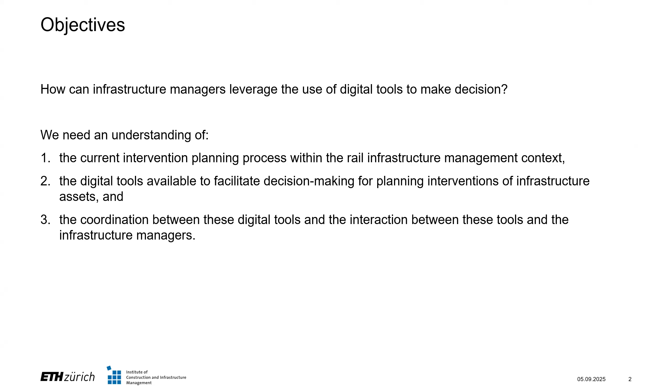For example, you can think of, let's say, a corridor between two cities. Maybe they expect the population to increase in one part and they will need to commute between the two areas. And they might want to increase the capacity by building a parallel track next to the existing corridor. So that would be an example of what would be a network development.

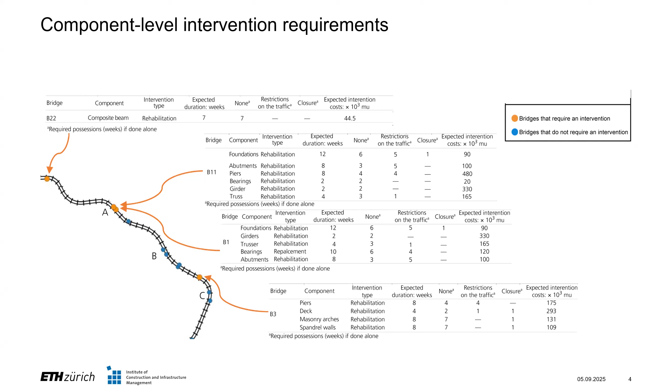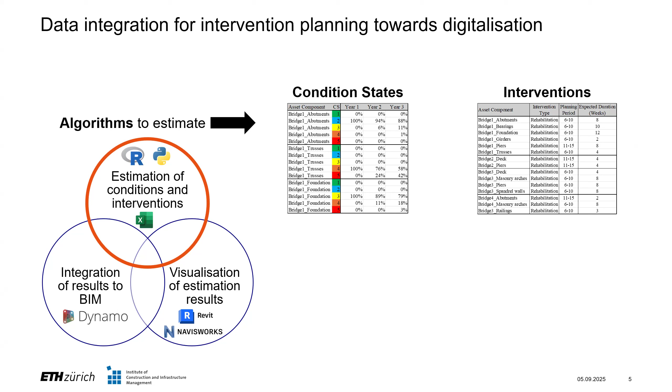So with that said, we have the algorithms that can estimate the condition states as well as the intervention on a component level. And the goal here is to be able to create a 3D model based on whatever information we can find, whether it's from 2D plans or from satellite imagery, and connect that information on the condition states and the interventions and embed it within the BIM models so that the stakeholders can easily play with the model itself to visualize that information as well.

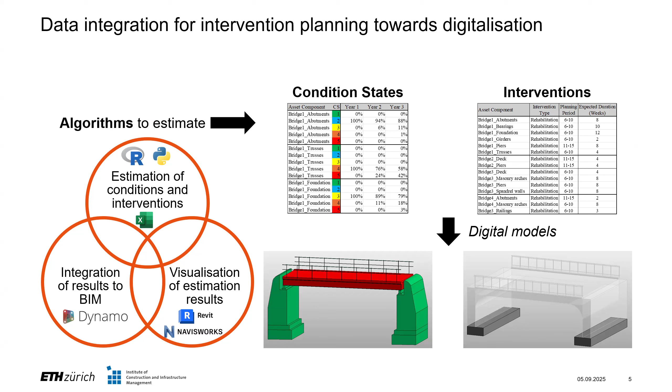So here is how we have defined the scope of the work in the context of this railway network. It's located in Switzerland, composed of 30 different bridges of 4 different types, with steel, composite, masonry, and concrete.

Here we have largely relied on 2D drawings to create the 3D models using Autodesk Revit.

Here we were pretty clear about the level of development that we expected the models to have. The level of development can range from 100 to 500. 100 is a very basic model that shows the general shape of how it will look like, versus level 500, which has very detailed connections, typically used and required for construction activities.

The models we have done here are roughly between 250 and 300, and to us that is sufficient in the context of intervention planning at this stage, because we are only interested in seeing how the component level condition state and interventions would evolve over time. We don't really need to see how the connections will look like between the different components. So that's the level of development we have done in this railway network.

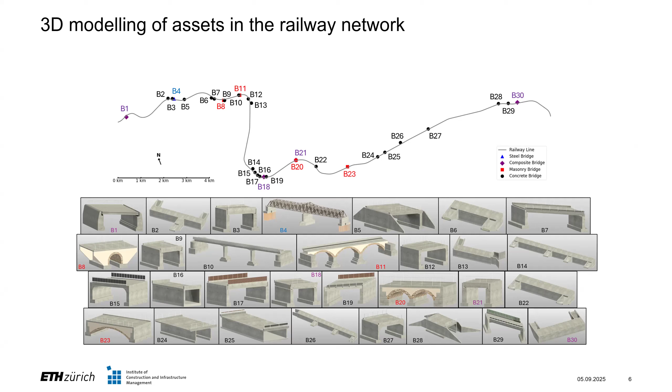Then the next step becomes how we can show this information to cater to the needs of the different stakeholders that are involved in the intervention planning process.

Just to do a quick recap, we have these 3 main stakeholders who we are very much interested in to help make better and faster decisions. First, the asset managers who specify the intervention requirements, typically done 4 to 12 years before the planned execution of those interventions. Here the granularity of their decision making is typically done in different planning periods in Switzerland, these are typically five years for the railway planners, but it can be longer depending on what kind of assets they are working with.

Also, the network managers, who, like I said before, are interested in clustering the interventions in a way that minimizes the impact to the stakeholders. Here they also define the specific work zones that each project would be part of, so the perimeter of a corridor or within a certain region, on what interventions can be grouped into that.

And finally, the production planners and the project managers who would define, in increasing level of granularity, the closure required to perform the interventions, as well as the sequencing of those interventions from months to weeks to days.

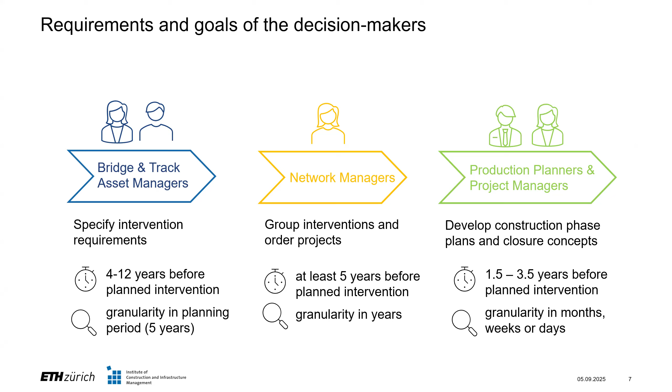So this is first an example of how the information will look like in terms of visualizing the component level condition state on the assets.

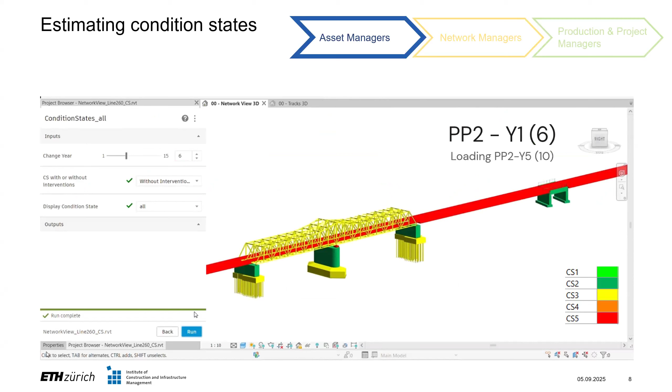This is a demonstration using Autodesk Revit, and the plugin we use as well is called Dynamo, which is able to link the information output from the algorithm and then embed them within the properties and attributes of the model elements within the BIM model itself.

Here they can play with the different year, the different specific filters, to really get a good sense of how the condition state will change over time.

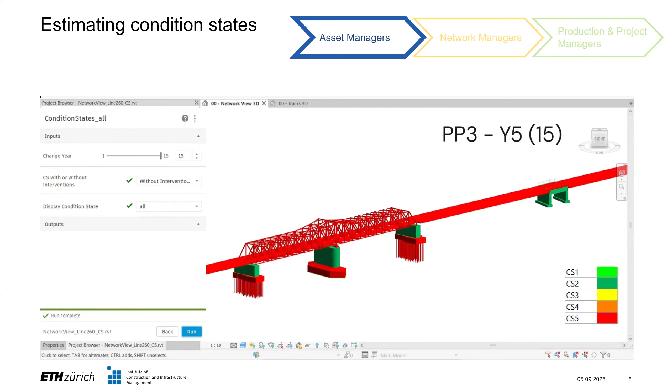They can also see the information on the intervention requirements on the component level. They can see the same table that we saw at the very beginning of the presentation from the output of the predictive algorithms, information like the cost or the expected disruption or the closure required to perform the work. Also the type of intervention that is expected to be performed on those components.

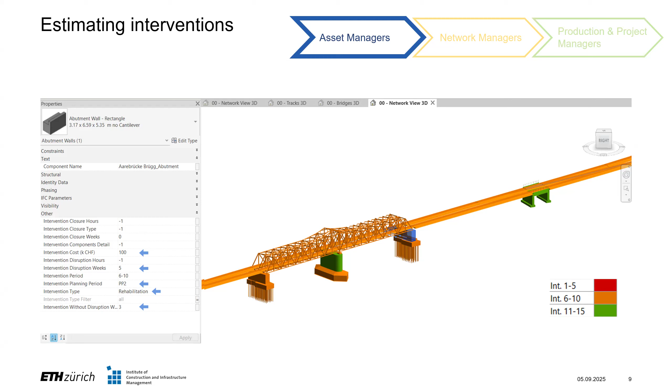Once this information is defined, let's say the asset manager has already output a list of the required interventions after having gone through the engineering analysis, then the network manager can cluster this information and then optimize the grouping of those intervention requirements that they receive from the asset managers.

So this is the demonstration of how we can visualize the output from the optimization algorithm that have already clustered the intervention requirements, and they can filter based on the planning period into the future, whether it's year 6 to 10 or 11 to 15. They can filter based on the time window, whether it's a weekend or the week, or in the evenings. They can also look at what components have been clustered to which specific year of planned intervention into the future.

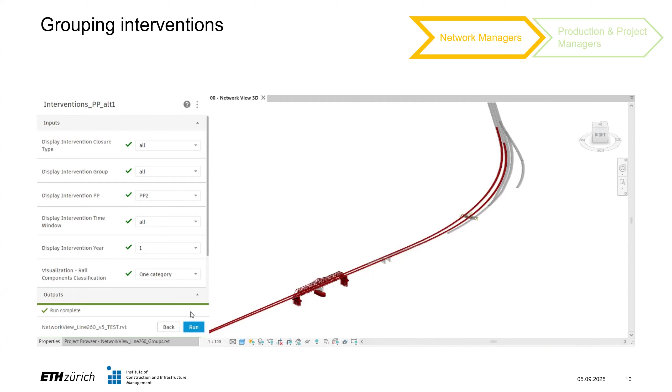In this specific demonstration, the network manager can very quickly see the relevant components according to the filtered criteria we have set out in this example. And this is not only beneficial for organizing the spatial understanding of the components required within this specific planning period or planning year, but it's also a very effective way to disseminate this decision to the other stakeholders involved in the intervention planning process.

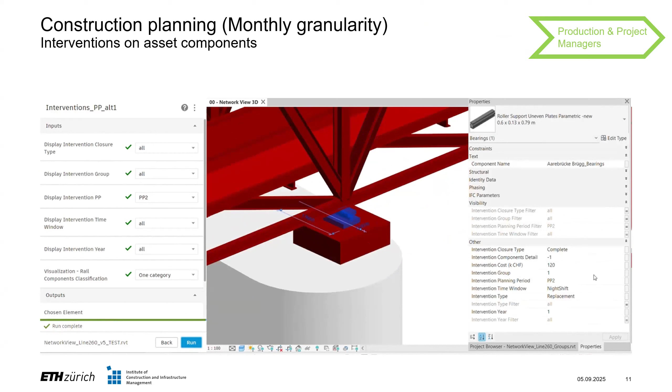Using the same type of information, the production and project managers are also able to click on any specific components of the model to look at the estimated information in terms of the time window or the type of interventions required on different components. And this is always aligned between the different parts of the planning process, between network management, project management of clustering the project, and also the actual planning of execution.

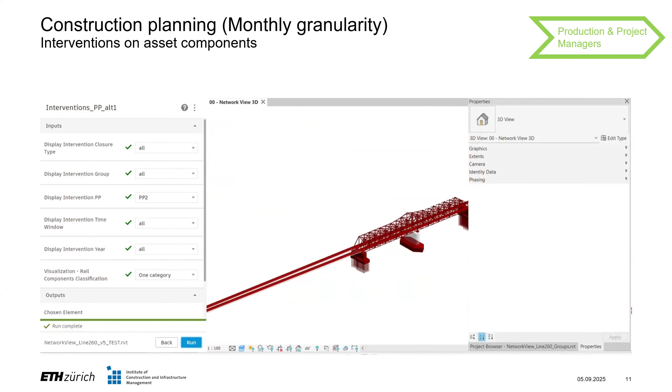So the goal here is to really have a very streamlined flow of data and information from one part to the next. And in terms of how they can look at the spatial temporal aspect of this same information, this is a very typical view of how they plan the construction of interventions. On the x-axis, you can see the spatial ordering of the different stations, bridges, and assets contained within this railway network, and vertically you can see the time scale we're looking at.

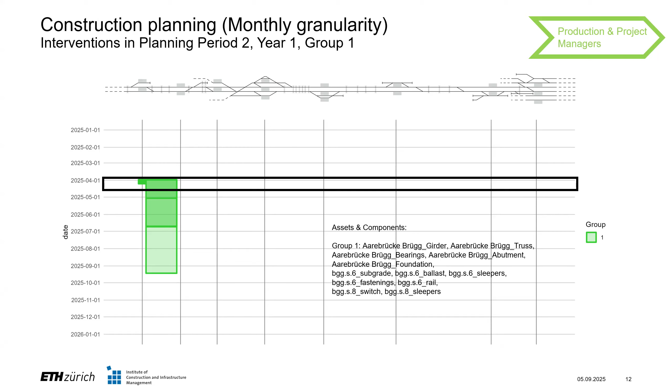So this is the direct output from the algorithm, where we can see what kind of components have been grouped within this specific clustering of the project. This is done on a monthly scale, but we can also incorporate the train schedule information and look at it in increasing granularity, in this case daily, to really see the impact of the planned interventions on the network and what it means to stakeholders, whether passenger trains or cargo trains that need to use this network in the evenings, for example.

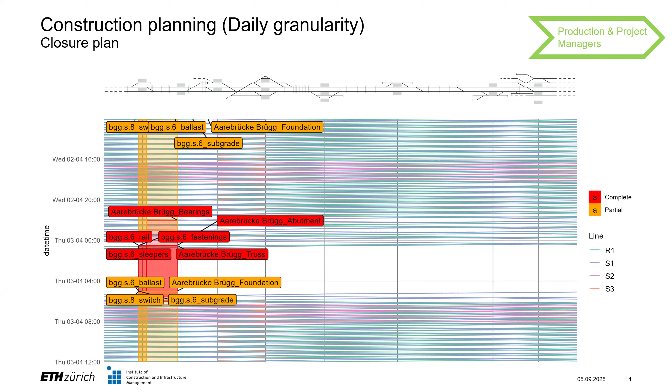And we can zoom in more to really see exactly how these planned interventions on the components should be done. This information can be exported into a table to then incorporate it back into a BIM environment, in this case using Navisworks, where we can really see the sequencing of the interventions.

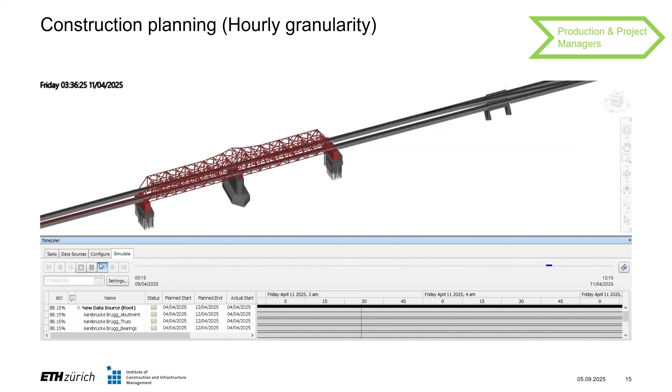So this is not necessarily the plan defined exact way of how the project should be run. This is done quite early on in the intervention planning process, say three years beforehand, before the planned execution of those interventions. But at least this gives a pretty good sense for the production planners and project managers to see exactly how the sequencing will look like as suggestions.

But of course, once they get more detailed information and coordinate more closely with the capacity planning team, they can define the exact sequencing of those interventions.

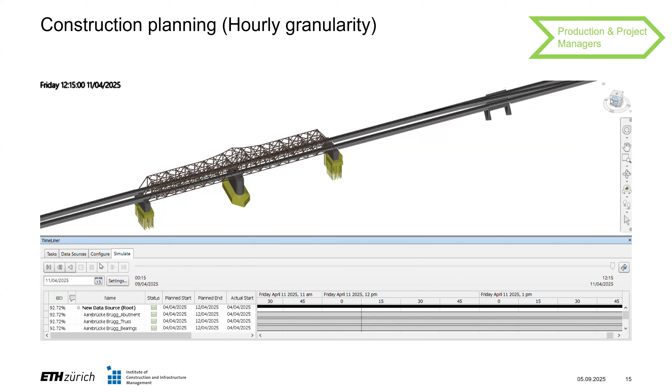So in terms of how all this work will fit within the planning process, these are the areas where we think the asset management perspective, the network management perspective, and the project planning perspective would benefit, where we see the use of BIM and incorporating the output from the predictive algorithms can really benefit decision making.

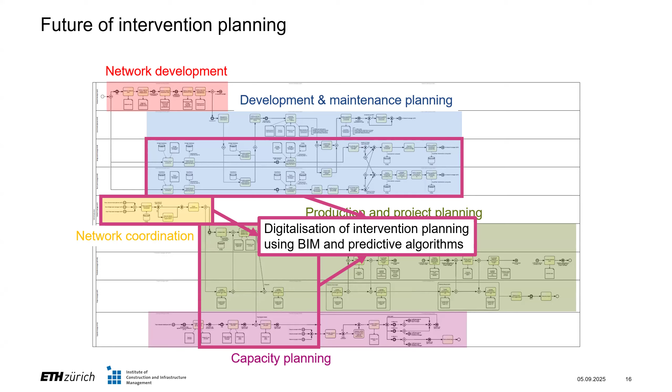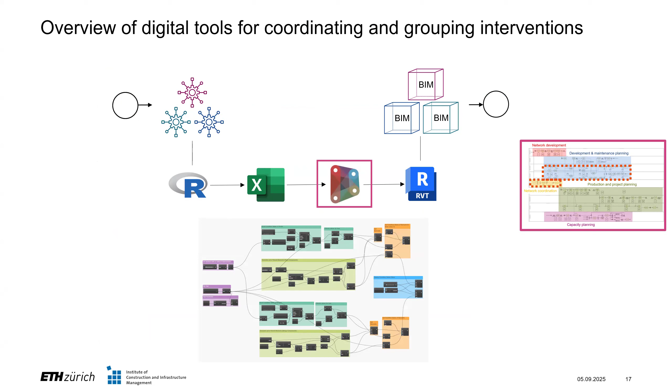And just to quickly go over some of the tools we used, we have the output algorithm which we currently work with in Excel, for example, and that information is fed into the BIM model using Dynamo, a plugin in Autodesk Revit, to link the information from the output of the algorithms and embed it specifically within the properties of each element within the model, which would eventually look like this when you visualize that information.

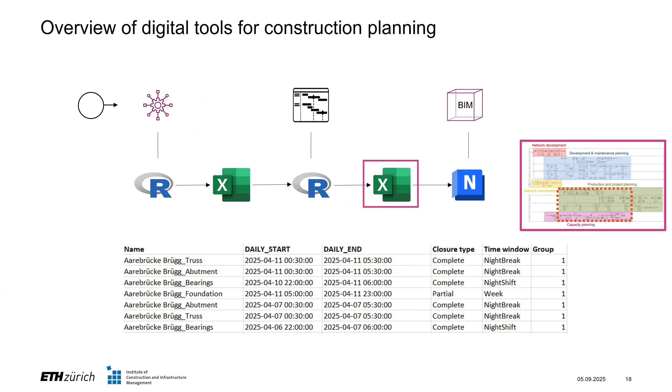And similarly, for construction planning, we have the output from the algorithm, and after incorporating the train schedule information, we can then set the defined sequencing of those estimated interventions, and put it back into the BIM environment to really visualize how those things will progress over time.

And that concludes my presentation, where I hope you get a good sense of how we approach the problem of digital transformation within the railway infrastructure management space, where we first try to understand how people make decisions and what tools they use to make decisions. And from there, we were able to develop methodologies and different approaches and digital solutions that we hope cater to the specific needs of the stakeholders involved in the decision-making process of intervention planning for railway management.

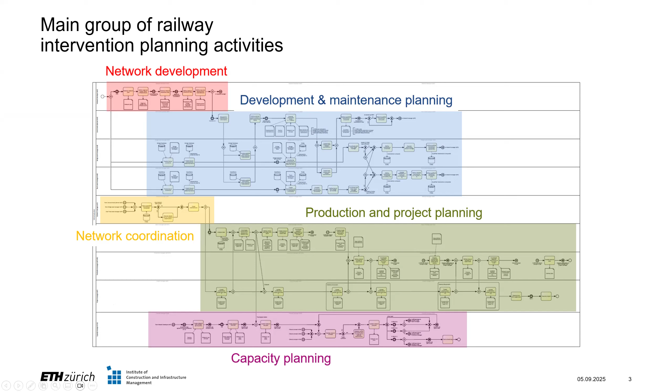If there are any more questions from the audience, otherwise, thank you so much, Steven, for a great presentation, and I'm gonna introduce our next speaker. Our next speaker today is Cal Skiles. He is a PhD candidate here at Northwestern University. He's working with Professor Pablo Durango-Cohen. Cal completed his undergraduate studies in industrial engineering at the University of Illinois at Urbana-Champaign. His current research is focused on multimodal freight systems, infrastructure management, and simulation. Cal, whenever you're ready.

Hi, Pablo. Can you see my screen and hear me clearly?

Yes. Great. All right. So as Pablo mentioned, I've been working on a research project related to multimodal freight systems. And what we're going to talk about here today is a multimodal freight transfer facility simulation platform. And this work is done on a project funded by the ARPA-E program within the U.S. Department of Energy. And it's a project that we're working on here at Northwestern with some collaboration from a group at Vanderbilt. And I'd like to thank my advisor, Professor Durango-Cohen, for all of his help.

So to start, we're going to go over an overview of the project as a whole, give a little background on what one of these multimodal freight transfer facilities is like, present a MATLAB Simulink model that is the simulation platform itself. We're going to go over a few modeling scenarios that show what it can do and what the different outputs can be, then present its currently available form in a publicly accessible dashboard, and then a little bit of future work.

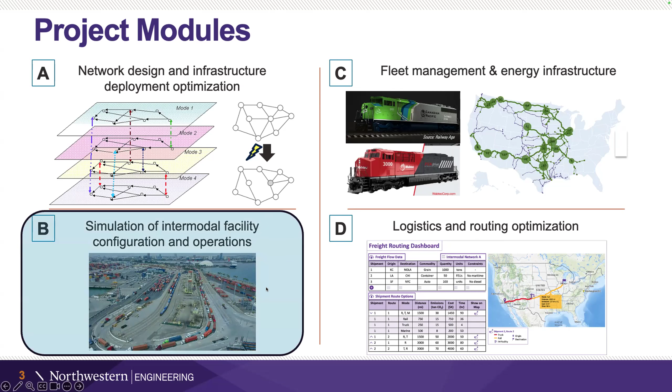And then the module that we're going to be talking about for today's presentation is the simulation of intermodal facilities, their configuration and the operations within them. And when we're looking at one of these facilities, what we did at the beginning of this project is we went to this inland port area near Joliet, so just outside of Chicago, where there are multiple very large intermodal rail yards where containers are primarily transferred from trains to trucks to reach their ultimate destination, but also in the reverse direction of being brought to the facility by trucks and removed by trains.

These facilities have these electrified wide span gantry cranes that handle the loading and unloading in most situations. They also have some reach stacker cranes that look more like trucks that drive around and handle individual containers. This area is considered an inland port because a lot of freight is directly transferred from coastal ports to the railroads and shipped directly here and unloaded like an inland port.

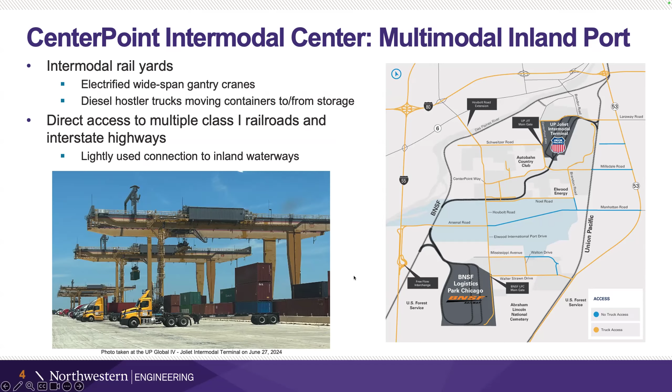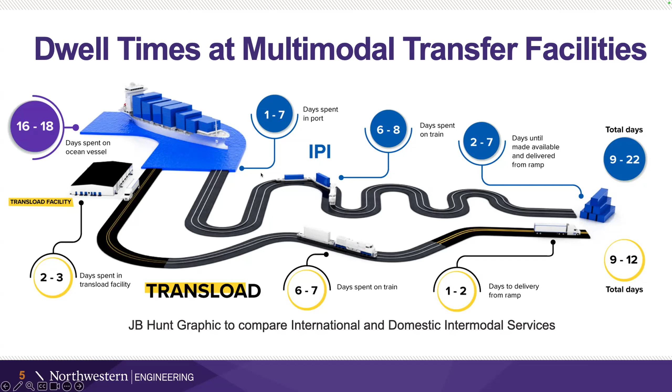And by removing this additional touch of all of the cargo being moved from one container to another in the transloading process, it becomes a more efficient process if we can just keep it in a single container the entire way. So with this facility simulation analysis, what we're trying to do is be able to answer some operational questions for these facilities to increase their overall efficiency and make them more

enticing for shippers. So a few questions to consider: what facility upgrades to prioritize if we're looking at a potential increase in volume? We could look at a number of different strategies to do so, such as increasing the number of staging spaces, the number of cranes, reducing the cycle time for the hostler trucks making these moves. Another is considering the transition to battery electric hostler trucks to replace the diesel powered and show how you can vary a number of these different input parameters. We'll look into this one in detail as one of the modeling scenarios and outputs.

And the last one is, what can we do about these dwell times? How can we change specific parameters that we can control to lower these overall dwell times? And one of those is looking at a priority inbound container lane where there is less dwelling because there is not even a hostler move. And we're going to look at that a little bit as well as a modeling test.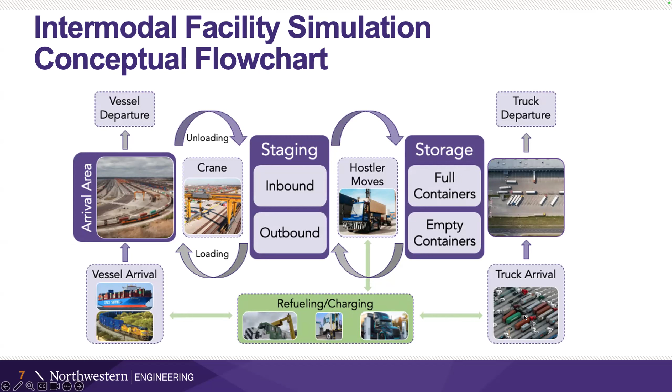Specifically, the hostler trucks are the key component of the simulation, but we have the ability to expand to consider the external trucks and/or the vessels, such as locomotives.

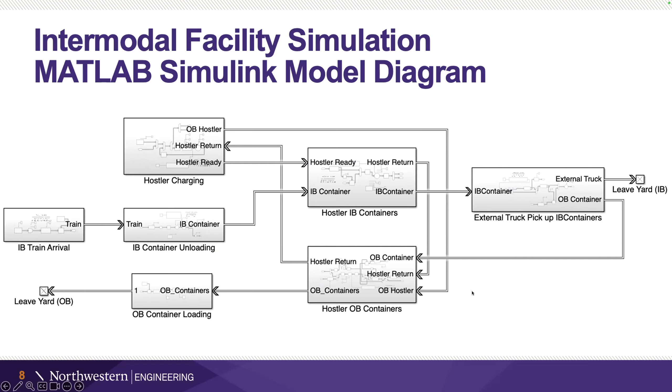This slide is just to show how this conceptual flowchart and the Simulink diagram have a similar overall layout. You can see kind of a similar flow through each one of these diagrams, and it gives a little more context to what's going on since we're not really digging into it. We're going to show a couple of these subsystems quickly to give some context as well.

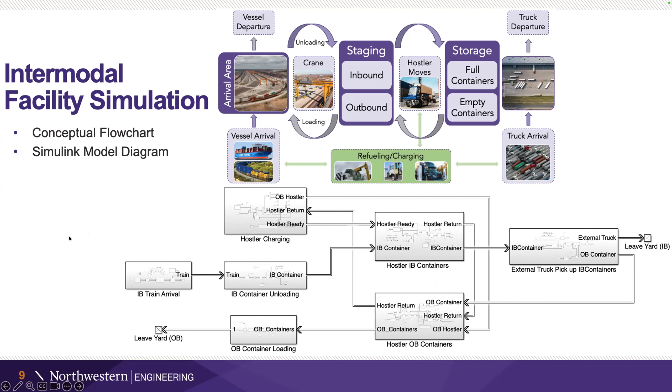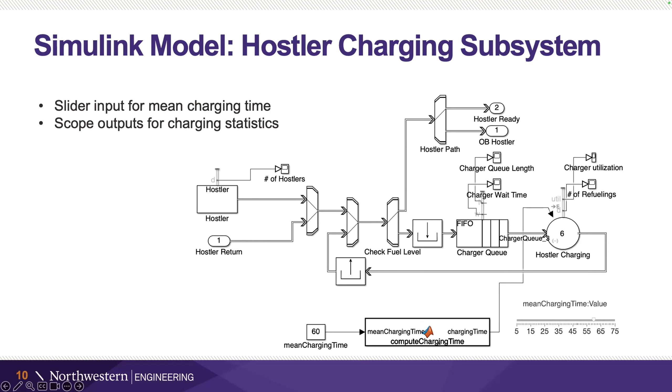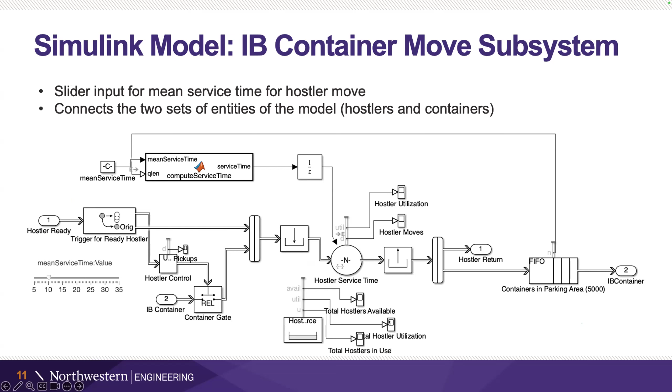But in the cases we're going to talk about today, we're going to look at the hostler charging subsystem. So we're going to vary the number of hostlers, the number of charging stations, the mean charging time to delineate between the diesel hostlers and the battery electric hostlers, and then the final case we're going to look at is the percent of containers via priority path.

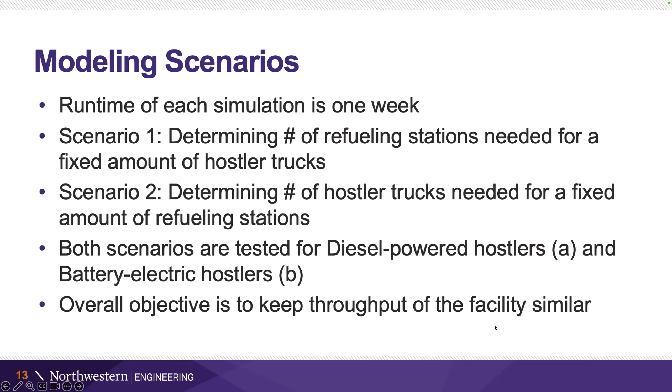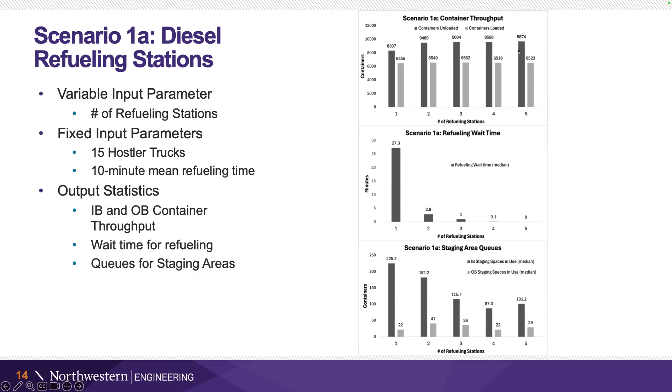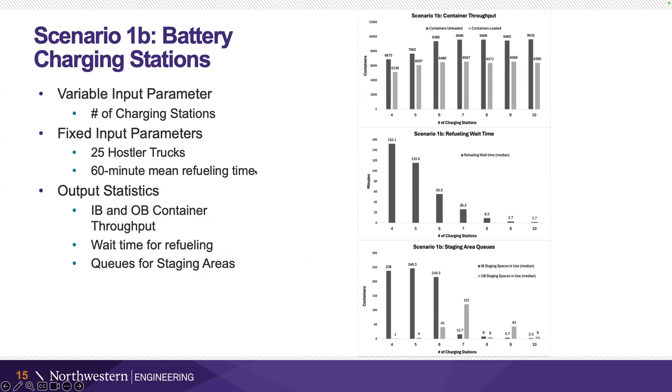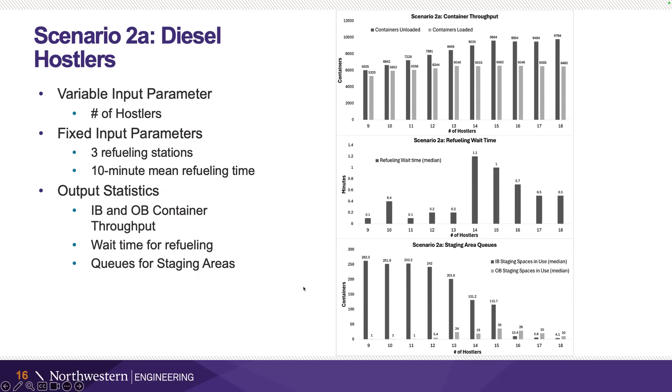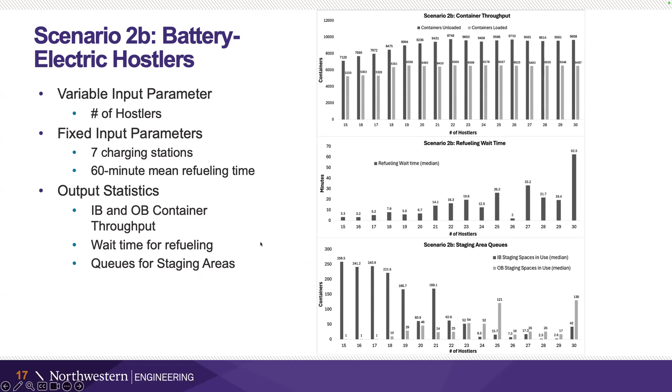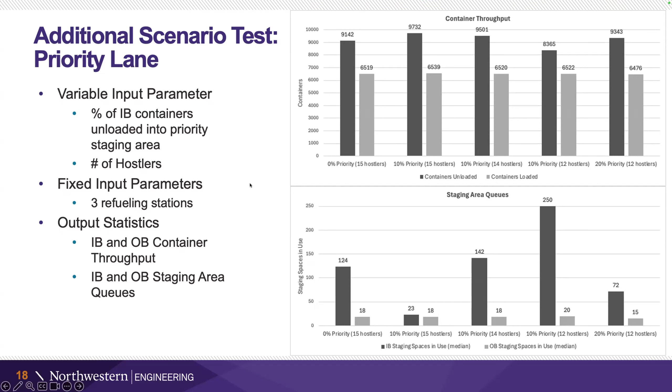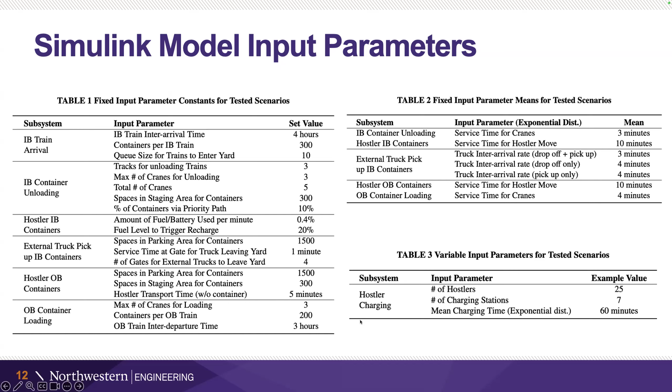Okay, yeah, because I was expecting... Yes, okay, understood. Thank you for that clarification. Yeah, I need to be more clear on that. No worries. So if you were to go to the online dashboard, this runs in less than 2 minutes.

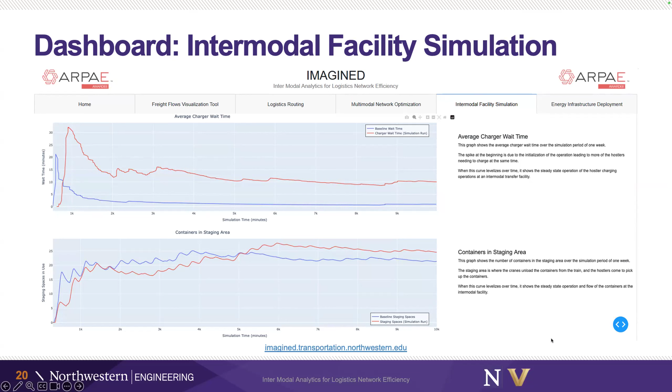Thanks, Pablo. Thank you. Thank you for organizing. Thank you, guys. Thanks. Bye.